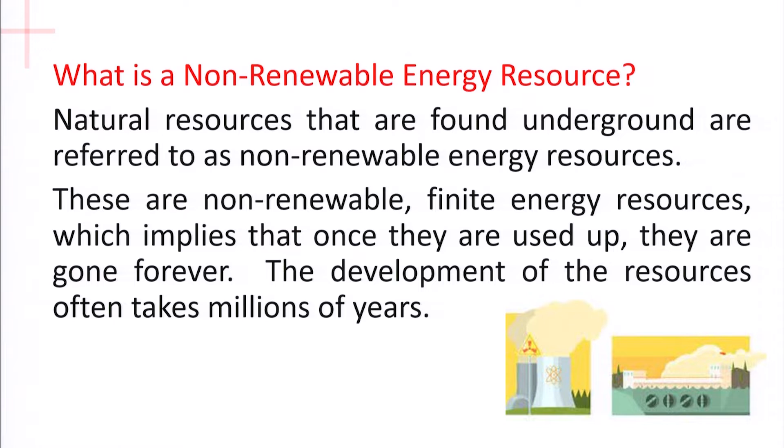What is a non-renewable energy resource? Natural resources found underground are referred to as non-renewable energy resources. These are finite energy sources, which implies that once they are used, they are gone forever. The development of these resources often takes millions of years. The two major non-renewable resources are fossil fuels, which include coal, oil, and natural gas, and the other is nuclear power, which is obtained from uranium ore.

Non-renewable energy sources are extracted in the form of solids, liquids, and gas, which are subsequently transformed for consumption. The solid form is coal, whose composition includes carbon, hydrogen, nitrogen, sulfur, oxygen, and minerals. The oil form is petroleum, with composition including carbon, hydrogen, nitrogen, sulfur, oxygen, and minerals. The gas form is natural gas, which has all the others except minerals.

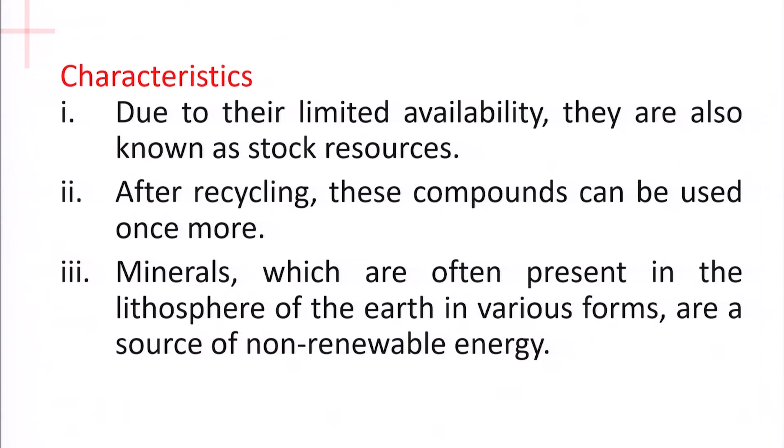What are the characteristics of these fossil fuels? Due to their limited availability, they are also known as stock resources. After recycling, these compounds can be used again. Minerals, often present in both coal and petroleum in the lithosphere of the earth in various forms, are the source for non-renewable energy. Non-renewable energy sources can be found in gas, solid, and liquid form, in all three states of matter. Non-renewable energy resources include coal, ignitable materials, petroleum, and natural gas.

Now let us see the fossil fuel coal. The use of coal as an energy source has a long history. The Chinese mined and exploited coal as a fuel since 10,000 BC, and also used it for smelting of ores. This resource was also used in several parts of the world during the Bronze Age, between 2000 and 1000 BC.

In more recent times, coal still provided 25% of the world's primary energy supply, ranking behind oil at 35%, and ahead of natural gas at 21%. Because the reserves of coal are large compared to those of oil and natural gas, coal was an important energy source for the common man.

About 300 million years ago, plant debris that flourished in freshwater wetlands gave rise to coal. Now let us see how this plant and animal matter gets transformed into coal.

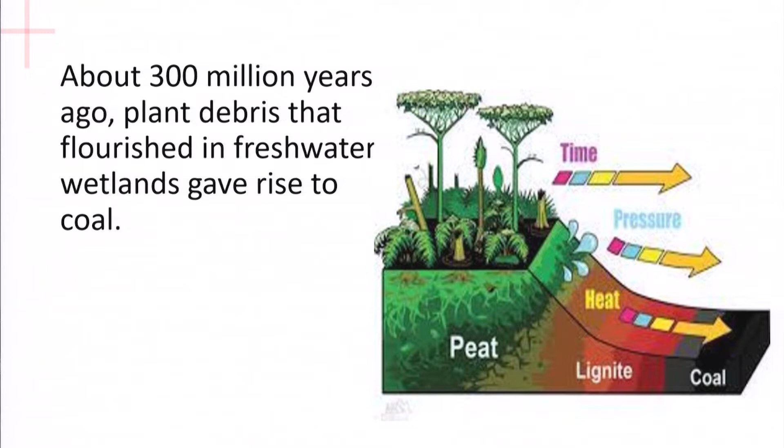Peat, also known as peat bog, was created as a result of the accumulation of dead plant matter. Since the plant matter piled below the water, the lack of oxygen in the wetlands prevented decomposition. Many peat sites are submerged inside the oceans, and the peat was then covered with sea sediments. The nature of the peat bog progressively altered due to the weight of these sediments above it, and slowly, over millions of years, coal was created.

Even though peat is a low-grade fuel because of its high water content, it is nonetheless very useful as a fuel today. After being pushed down by silt over many centuries, peat eventually turns into coal.

It first transforms into lignite, which is a low-grade coal, also known as brown coal. Rock that is dark or brownish is coal, and coal is burnt to produce energy. The transformation of ancient life into coal is known as carbonization.

3 meters of dense vegetation is required, and when this 3 meters of dense vegetation is crushed, we get just 1 foot of coal. So we need 3 meters of vegetation over millions of years, which gets transformed into just 1 foot of coal. That is the extent of the number of years required to form coal.

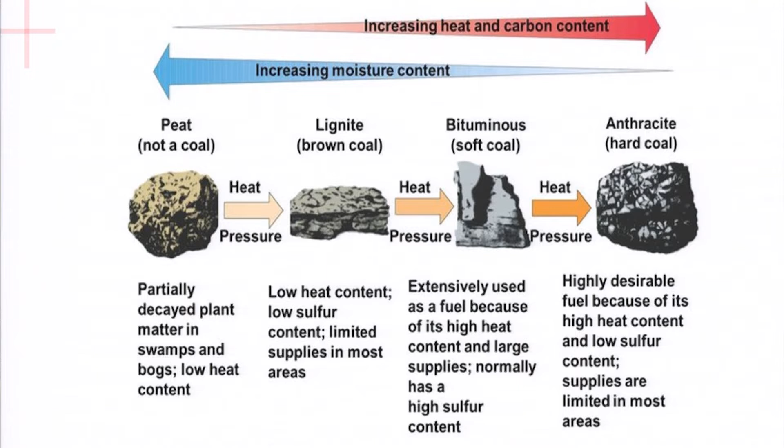After many years of heat and pressure underneath the earth, we get anthracite, which is the hard coal. Hard coal is a highly desirable fuel because of its high heat content and low sulfur content, but supplies are very limited and available only in rare areas.

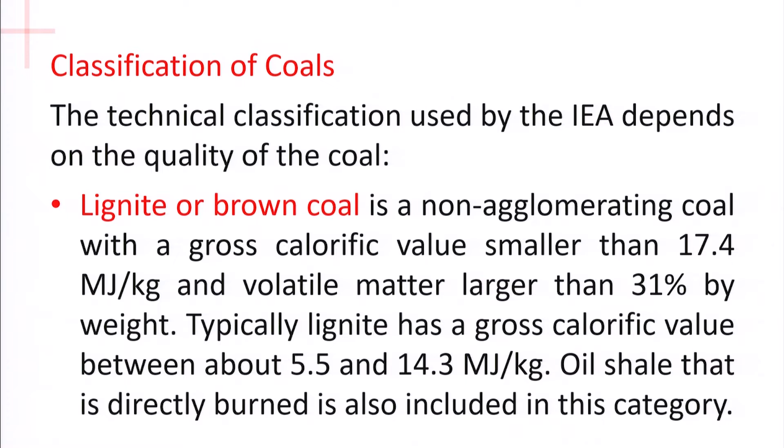Now let us see the classification of coal in detail. Lignite or brown coal is a non-agglomerating coal with a gross calorific value smaller than 17.4 megajoules per kg, which is the heat content available, and it has volatile matter larger than 31% of its weight. Typically, lignite has a gross calorific value between 5.5 to 14.3 megajoules per kg.

Subbituminous coal is a non-agglomerating coal with a gross calorific value larger than 14.3 megajoules per kg but smaller than 17.4 megajoules per kg, and the volatile matter is larger than 31% by weight.

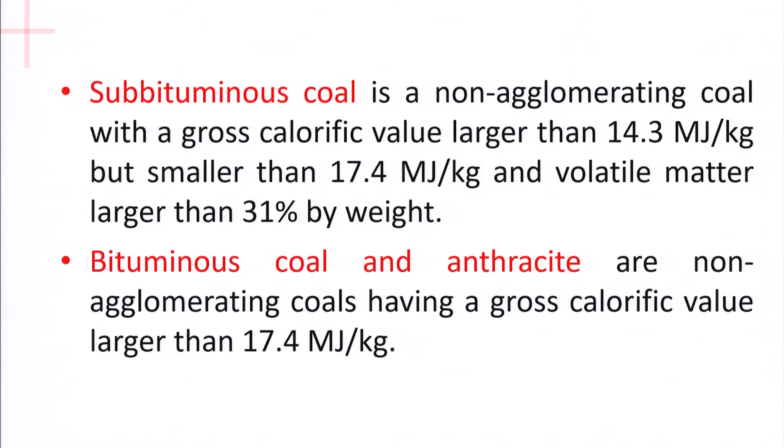Bituminous coal and anthracite are non-agglomerating coals with a gross calorific value larger than 17.4 megajoules per kg. So the heat content present in anthracite is very high.

Coal can be mined in two ways: either underground mining or surface mining. When coal is found beneath the earth's surface, often 300 meters or 1000 feet below the surface, deeper than the majority of the Great Lakes, underground mining is employed.

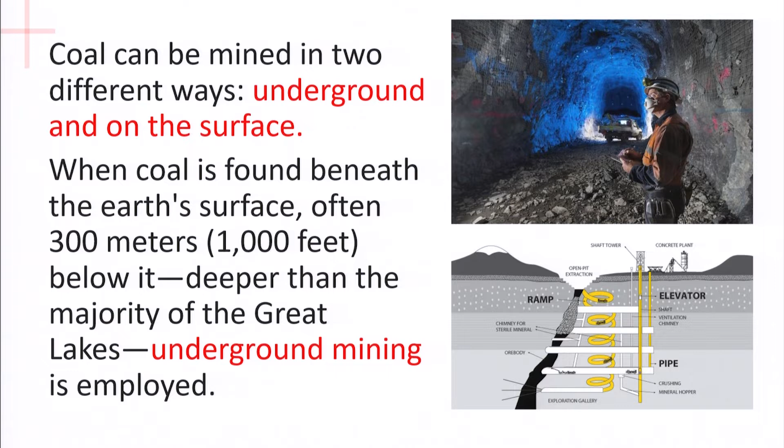As the animation indicates, underground mines are like tunnels where even vehicles pass through. The coal mined from these underground mines is transported using lorries that go inside the mines, and then it is brought out to the surface through elevators.

When coal is found relatively close to the earth's surface, it is called surface mining. Companies must first remove the region to get the coal - the soil and trees are removed, making it simpler to get the coal from the earth. This process results in the destruction of the natural habitat in and around that area.

These are the different layers found when coal mining is done. In underground mining, we have elevators that go deep down into the earth's surface, as mentioned, 1000 feet below, and tunnels are formed to mine the coal. The natural habitat in the region is not spoiled to that extent compared to surface mining, where the habitat is lost because the area is cleared for surface mining.

The different types of surface mining could be mountaintop mine, contour mine, high wall or auger mine, or area mine. These are the different types of surface mining methods.

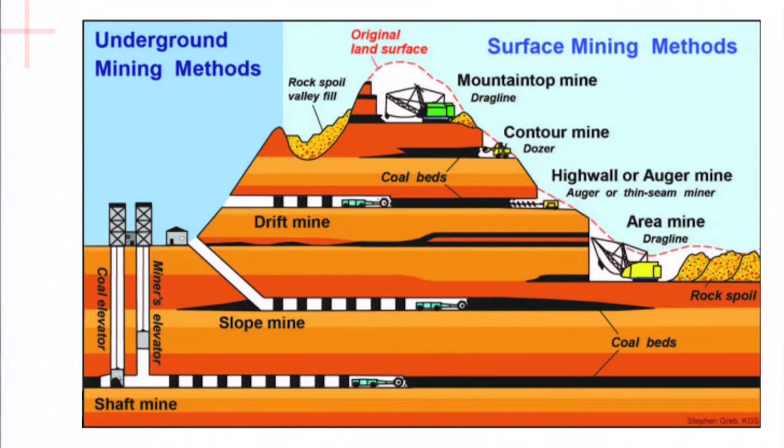Coal supplies around half of the country's electricity. Our lights, refrigerators, dishwashers, and the majority of plugged-in devices are all powered by electricity that comes from coal. Burning coal also produces worthwhile byproducts - the leftovers are used to create a variety of products, including cement, polymers, and roadways.

Looking at the uses of coal, 68% is used for electricity generation, and 18% is for general other purposes like refineries, paper manufacturing, chemicals, and pharmaceuticals. 7% is used for steel production, 4% for cement production, and 3% of coal is used for heating purposes.

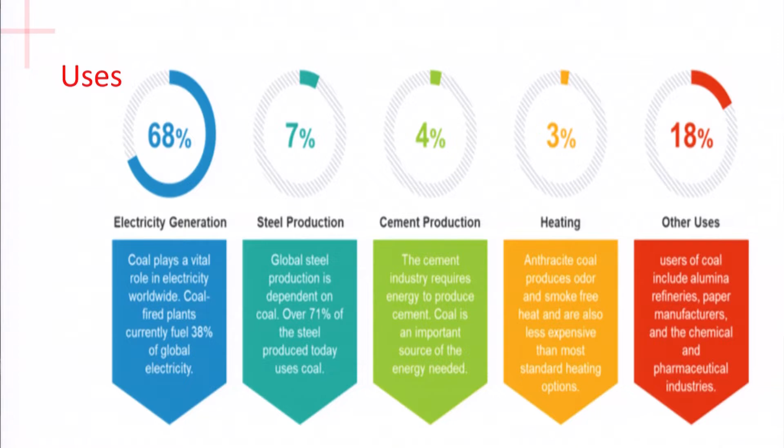However, coal is a very dependable form of energy. We can count on it to supply fuel and electricity day and night, in the summer or in the winter, whether there is sunlight or whether there is rain. So coal is a very dependable fuel.

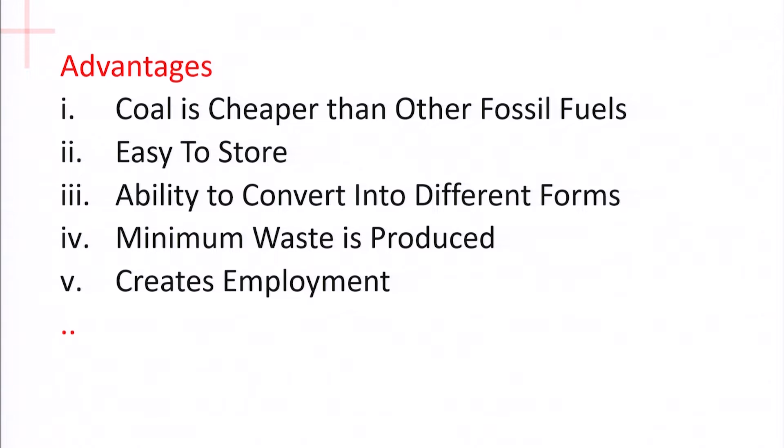However, it does have its own advantages and disadvantages. Advantages are: coal is cheaper than other fossil fuels, it is easy to store, it has the ability to convert into different forms of energy, there is minimum waste produced, it creates a lot of employment for people, it is highly compatible with minimal room for wastage, and it is a safe alternative.

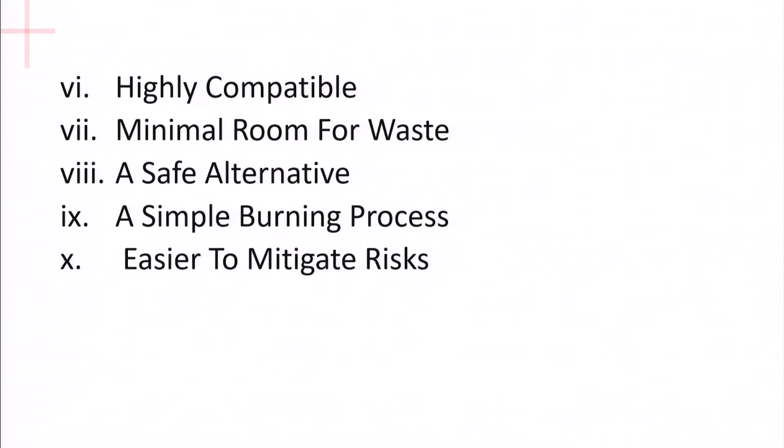It has a simple burning process and it is easy to mitigate risks. Now, there are so many advantages. Now, let us see the disadvantages and why we say fossil fuels is not an environmentally friendly fuel.

Disadvantages: it is non-renewable. The coal that has been formed over millions of years, we are taking it to produce electricity. So once we use the coal, we are not going to get back the coal. So it is non-renewable. It is harmful to health.

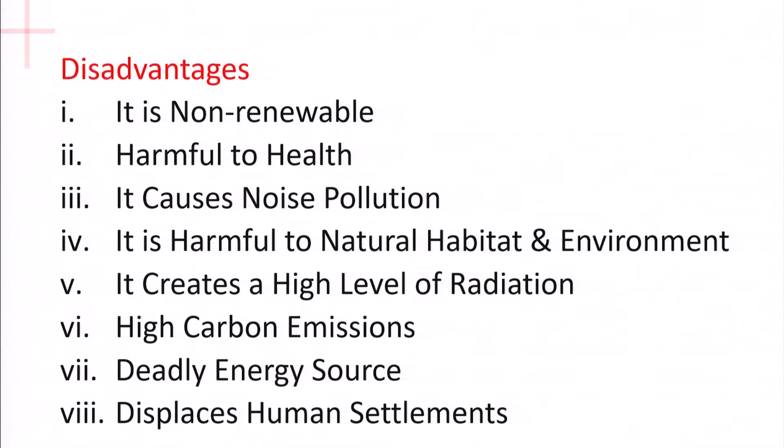It causes noise pollution. It is harmful to the natural habitat and to the environment. It creates a high level of radiation. There are high carbon emissions and it is a deadly energy source. It displaces human settlements. But still, with all these disadvantages, we continue to use coal to produce electricity and we

Mining operations, which involves digging, blasting and removing rocks and soil that are on top of the coal seam, seriously impact the air quality and the noise level. In areas where there are aquifers, situated close to the river or the water beds, surface mining causes erosion, causes pollution, and the water gets contaminated.

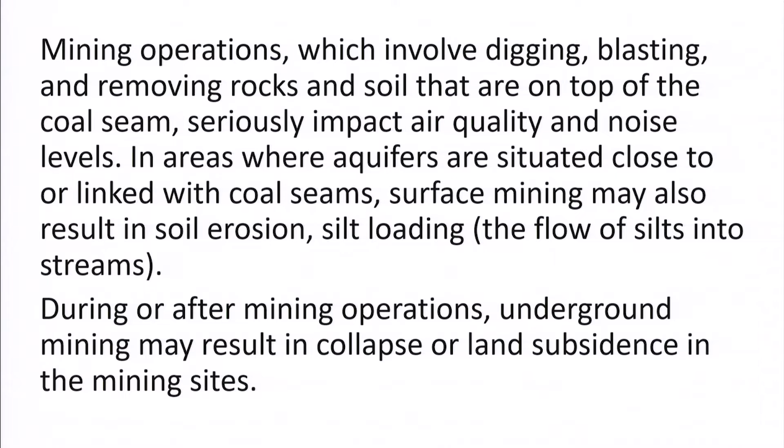During or after mining operations, the underground mining may collapse and land subsidence may take place in the mining sites. At work, coal miners risk cave-ins that could occur or sometimes explosions, because the miners are working inside the coal mines, which is the tunnels, and sometimes a cave-in may happen. So again, that's a serious threat to human life.

In addition, there is poisonous dust that is emanating when coal is being mined. So in addition to all these issues, the main cause of air pollution is the burning of coal in the thermal power plant where electricity is produced. That's the place where there is an enormous amount of air pollution that happens, which is harmful to the environment. It leads to climate change and several health hazards.

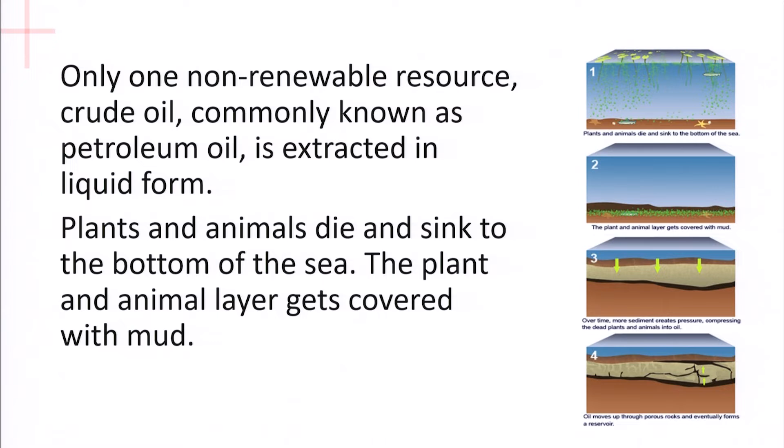Now coming to the second fossil fuel, which is petroleum, or in other words, oil. This non-renewable energy source, crude oil or petroleum oil, is available in liquid form. Plants and animals die and sink to the bottom of the sea. The plant and animal layer gets covered with mud. These remains were submerged under the mud and rock for over millions of years, similar to coal. Over time, more sediment creates pressure, compressing the dead plants and animals into oil.

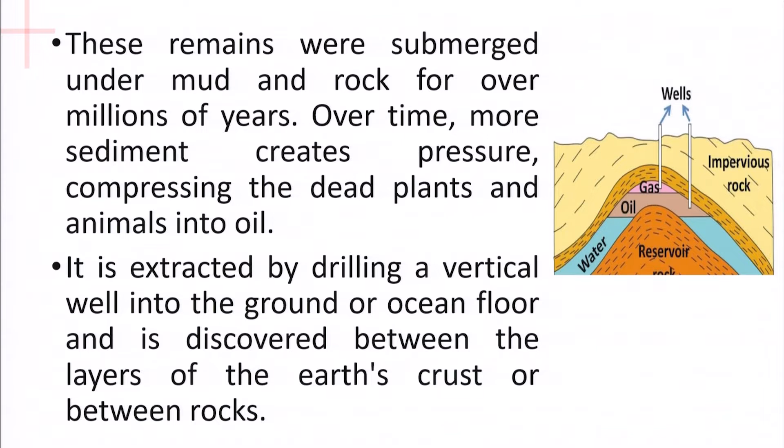It is extracted by drilling a vertical well into the ground or the ocean floor, and it is discovered between the layers of earth's crust or between the rocks.

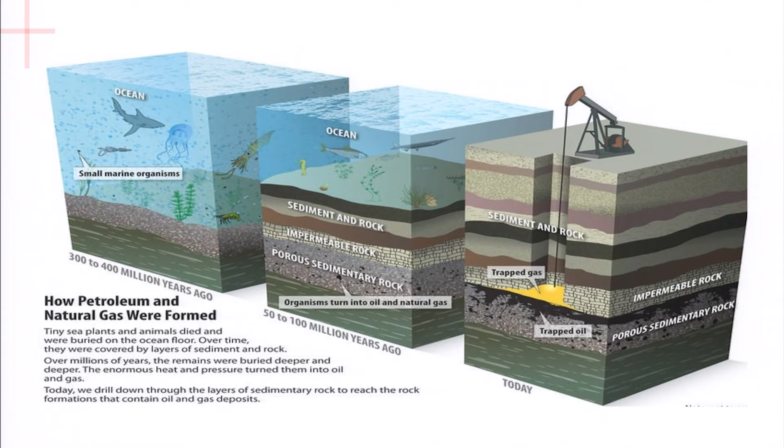Oil literally bubbles out of the ground in some locations. For example, in Los Angeles, California, at the La Brea tar pit, large pools of heavy oil are bubbling up through the soil. To reach the oil, we need to drill into the ground. Deposits can be found both on and beneath the ocean surface. Oil corporations can extract petroleum 365 days a year, 24 hours a day, using a drill rig. Companies dig offshore when oil is found beneath the ocean floor.

They need to construct an oil platform. Some of the largest man-made buildings are the oil platforms found in the oceans, known as offshore drilling rigs. Oil needs to be refined after it has been drilled. Petroleum, often known as crude oil, is a thick, dark liquid made up of flammable hydrocarbons with traces of oxygen, nitrogen, and sulfur.

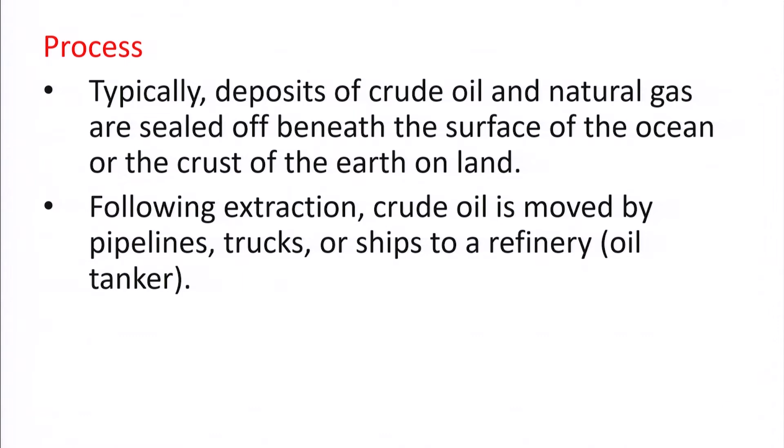Different types of products that we get from oil is possible through fractional distillation of the crude oil. Oil is heated and distilled in refineries to separate it into various components with various boiling points. As shown in the picture, we get gasoline around 25 to 60 degrees, petroleum gas at 25 degrees, naphtha between 60 to 180 degrees, paraffin between 180 to 220 degrees, diesel between 220 to 250 degrees, and fuel oil, which can be used in ships, between 250 to 300 degrees.

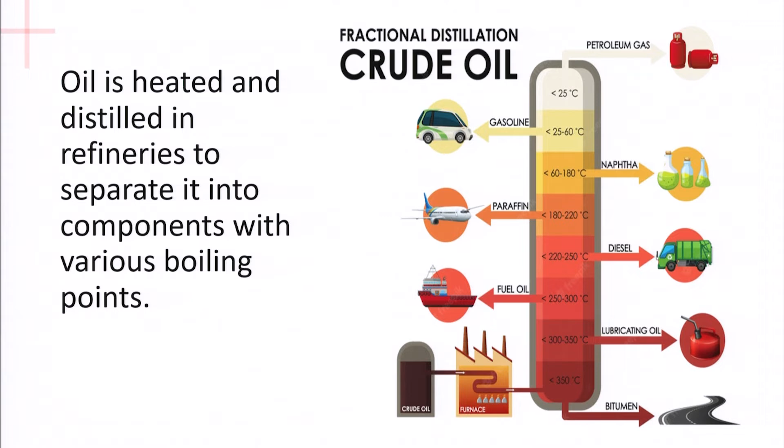Lubricating oil is a little denser. As we come down in the picture, we get liquid a little denser. So lubricating oil, which is a dense liquid, we get it at around 300 to 350 degrees. The crude oil helps us to get all these different types of products, byproducts, through fractional distillation.

The lowest level is the bitumen. Also tar is obtained, which is the waste out of the fractional distillation. Tar is also used for laying the roads. Gases and gasoline, aviation fuel, kerosene, diesel, oil, naphtha, grease, wax, asphalt are the key ingredients which we obtain from fractional distillation.

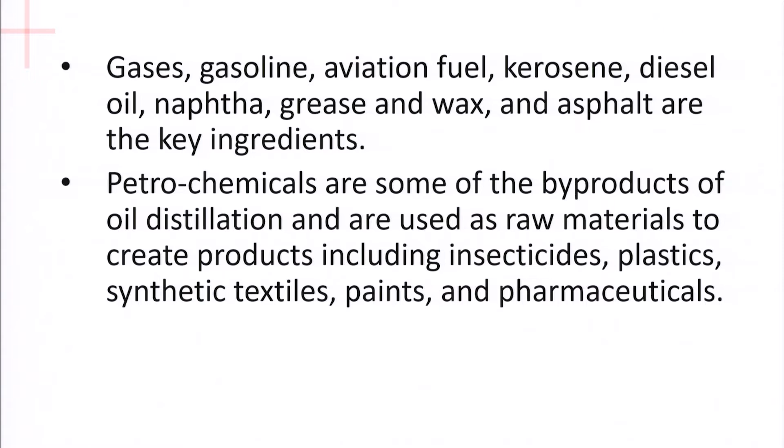Petrochemicals are some of the byproducts of oil distillation and are used as raw materials to create products including insecticides, plastics, synthetic textiles, paints, and pharmaceuticals. It is also used to produce plastics, heating oil, propane, jet fuel, artificial food flavors in addition to gasoline and diesel, and these are also used to power automobiles.

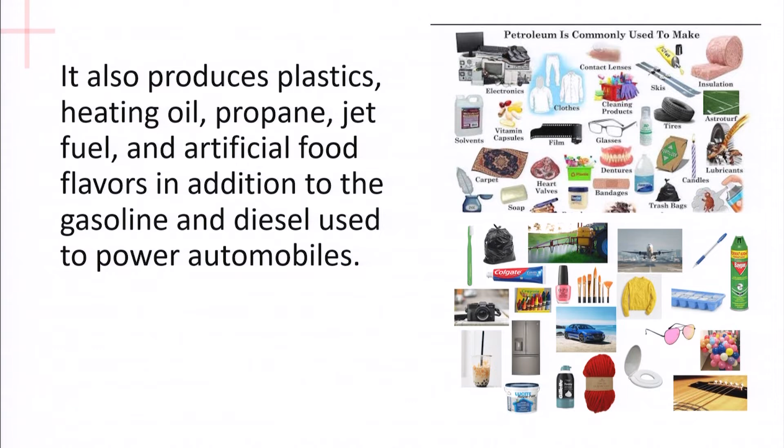Some of the petroleum products which are used is given in the animation. The remainder can be processed and used in solid products like water pipes, shoes, roofing, vitamin capsules, and thousands of other things. And the oil byproducts are also used for nail polish, etc.

So oil has got its own advantages and disadvantages. The cost of extracting is not very expensive considering the huge amount of oil that we get and the usage of the oil products. It is also a trustworthy and a consistent source of income and energy. It is a readily available energy source that enables us to travel by car in the form of petrol or diesel or natural gas. Numerous goods on which we rely contain petroleum as an ingredient.

Of course, it has its own disadvantages. The ecology is harmed when gasoline is used. We breathe in the dangerous fumes and gases that are released. More so, the fumes that come out of our vehicles has got very hazardous health impacts.

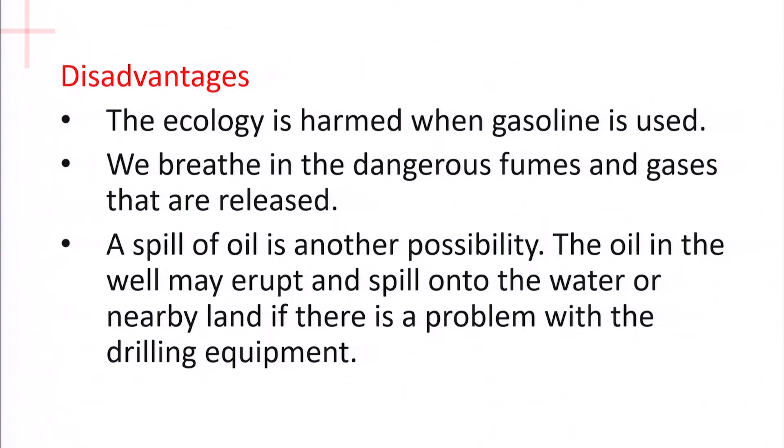A spill of oil is another possibility. The oil in the well may erupt and spill onto the water or nearby land if there is a problem with the drilling equipment. Environmental catastrophes are caused by oil spills, particularly offshore accidents. Oil floats on water, making it very difficult for the aquatic life, the fish, to survive, and it damages the aquatic life by the oil that is spreading over the ocean floor.

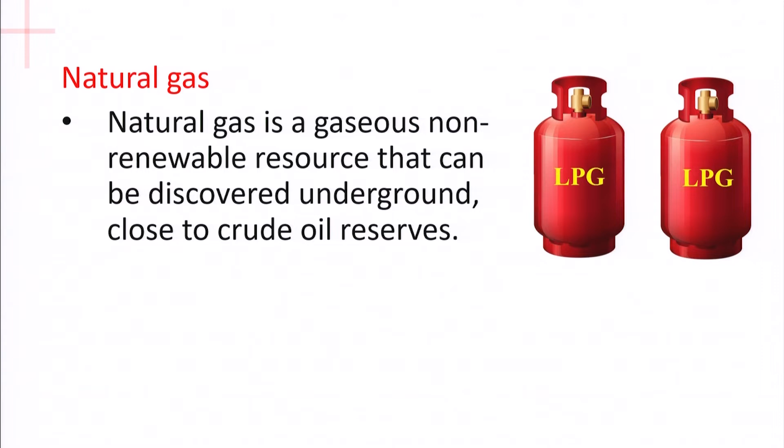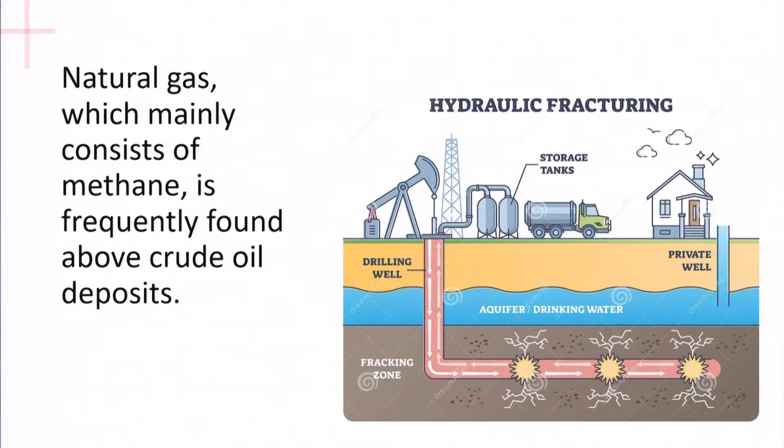Now coming to the third type of fossil fuel, which is natural gas. Natural gas is a gaseous, non-renewable resource that can be discovered underground close to the crude oil reserves. Natural gas, which mainly consists of methane, is frequently found above the crude oil deposits. Methane makes up the majority of the natural gas. Also, it can include other types of natural gas such as propane, ethane and butane. Additionally, it has trace levels of highly poisonous hydrogen sulfide as well as heavier gaseous hydrocarbons.

Natural gas is present underground in quantities that are measured in cubic meters. Deposits of natural gas can be found a few hundred meters under the ground. Companies can drill straight into the ground to extract the natural gas. In rock formations, they can extend maybe up to some kilometers wherein the natural gas is trapped.

Some businesses utilize a technique known as hydraulic fracturing, or fracking, to extract the natural gas. The term hydraulic or fracturing both refer to the use of water as a mechanism to draw out the gas. In this method, the subterranean rocks are torn apart using high pressure water. The stored natural gas will then be released from the rock formations. They can inject acid down the well to disintegrate the rock if it is very hard to break.

To prop open the rock and allow the gas to escape, sometimes they use a small, minuscule amount of sand particles or glass particles to break the rock.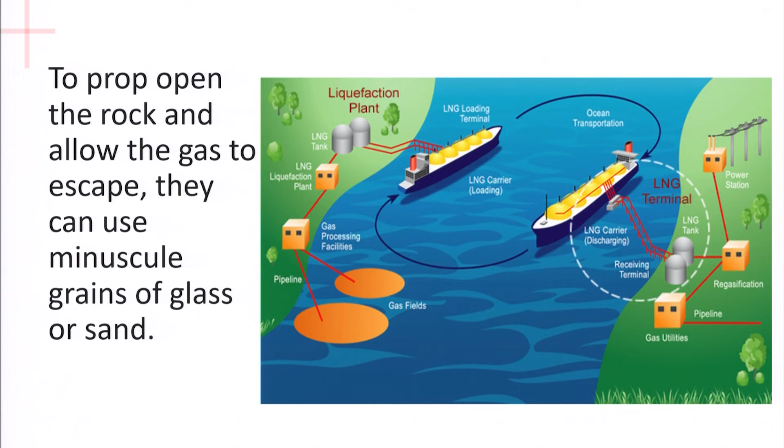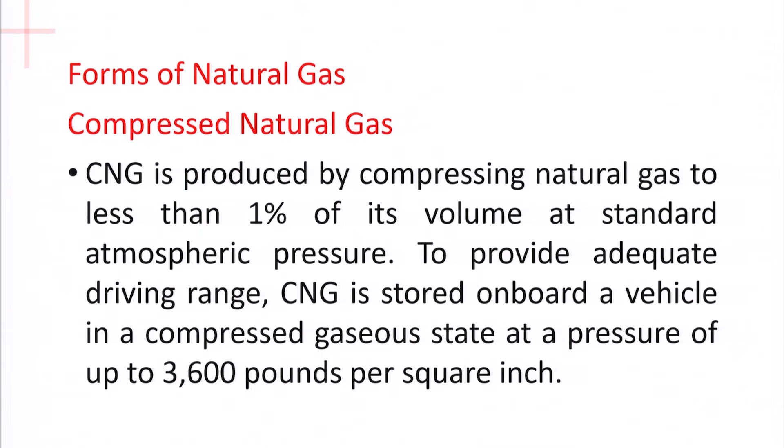Now, forms of natural gas. There are two forms: compressed natural gas, or CNG, and liquefied natural gas. Compressed natural gas is produced by compressing natural gas to less than 1% of its volume at standard atmospheric pressure. To provide adequate driving range, CNG is stored on board a vehicle in a compressed gaseous state at a pressure of up to 3,600 pounds per square inch.

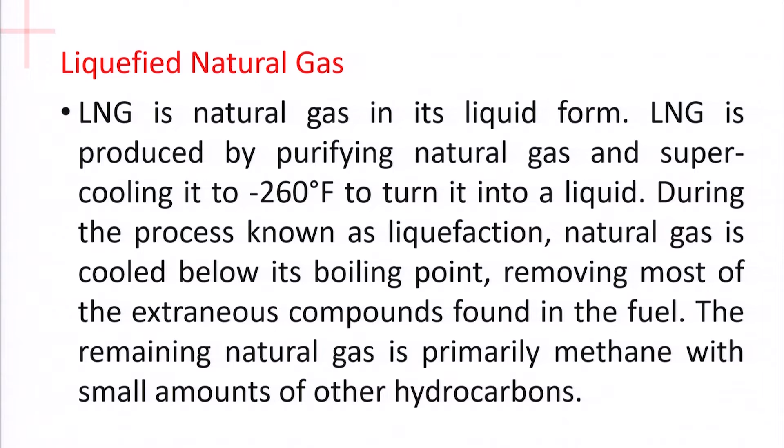Liquefied natural gas, or LNG, is natural gas in liquid form. LNG is produced by purifying the natural gas and supercooling it to minus 260 degrees Fahrenheit to turn it into liquid. During this process, known as liquefaction, natural gas is cooled below its boiling point, removing most of the extraneous compounds found in the fuel. The remaining natural gas is primarily methane with small amounts of hydrocarbons.

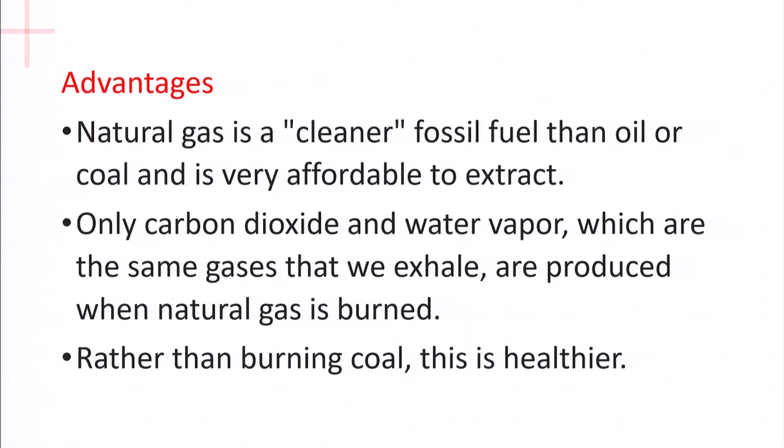There are advantages, as in all other types of fossil fuels, and there are disadvantages. Looking at the advantages, compared to other fossil fuels like oil and coal, natural gas is affordable to extract. Only carbon dioxide and water vapor are present, which, if we exhale it, is not very harmful. Rather than burning coal, this is healthier.

However, looking at the various problems associated with oil and natural gas, oil and gas leaks are a very important problem we need to address. Oil leaks are harmful if they get into the drinking water, and also harmful for aquatic life. Explosions may be caused by natural gas leaks from pipelines, storage tanks, and distribution tanks.

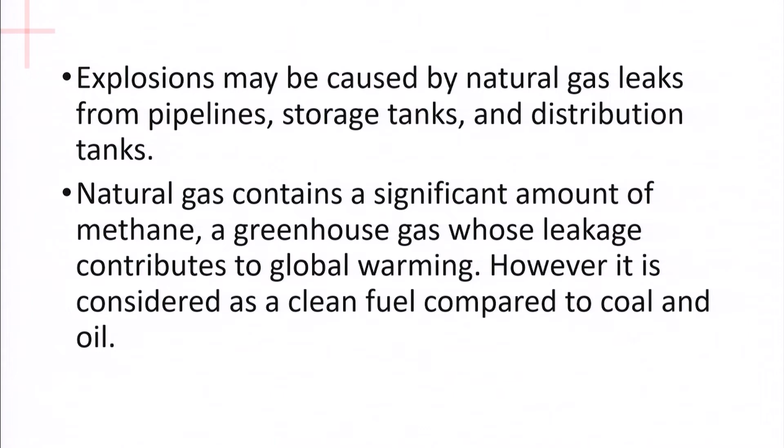Natural gas contains a significant amount of methane, a greenhouse gas whose leakage contributes to global warming. However, it is considered a clean fuel compared to coal and oil.

Subsidence, or land sinking, may also result from the extraction of oil and gas, similar to coal. Just like in coal mines, subsidence could happen in oil and gas mining as well. For instance, the extensive oil extraction that began in 1928 in the Long Beach Harbor neighborhood in Los Angeles, USA, resulted in considerable ground subsidence. The ground descended around 9 meters over the well location. There was a need for flood control measures along the shoreline due to the extensive subsidence. The cost of damage to roads, buildings, and other facilities is estimated at $100 million.

Brine was previously a significant issue with onshore oil wells. 10 barrels of brine are typically extracted for every barrel of oil produced. Early on, the brine was merely dumped into the ground or into adjacent waterways. Most brine today is injected back into the well. However, if the casing lining the well is broken or rusted, brine can contaminate fresh water and may get into the aquifers used for drinking water.

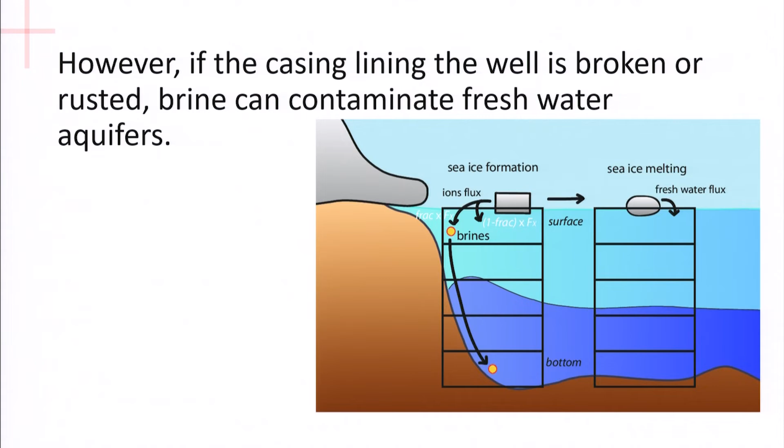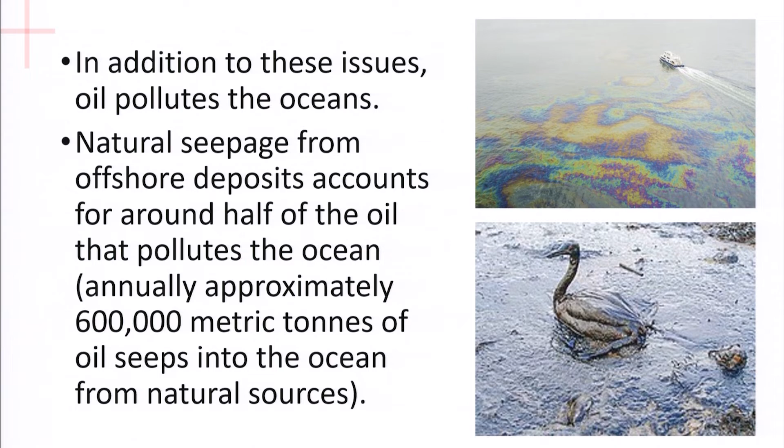In addition to these issues, oil pollutes the ocean. Natural seepage from offshore deposits accounts for around half of the oil that gets into the ocean floor. Annually, approximately 600,000 metric tons of oil is found to seep into the ocean, destroying aquatic life. Oil well blowouts, pipeline breaches, tankers, and pipeline leaks account for 20% of the oil that pollutes the ocean. The remaining oil is released inland and transported into the ocean by rivers.

In addition to routine operations, oil delivery to the coast also causes leakages from offshore wells. Both freshwater and marine habitats are impacted negatively by oil contamination. Aquatic plants and animals perish. It could take organisms 2 to 10 years to return to their original state.

Air pollution is also brought on by burning oil and gas. Environmental issues may arise during natural gas extraction. Mini earthquakes can also be produced because of the rock fracturing carried out to get the gas trapped in the rock.

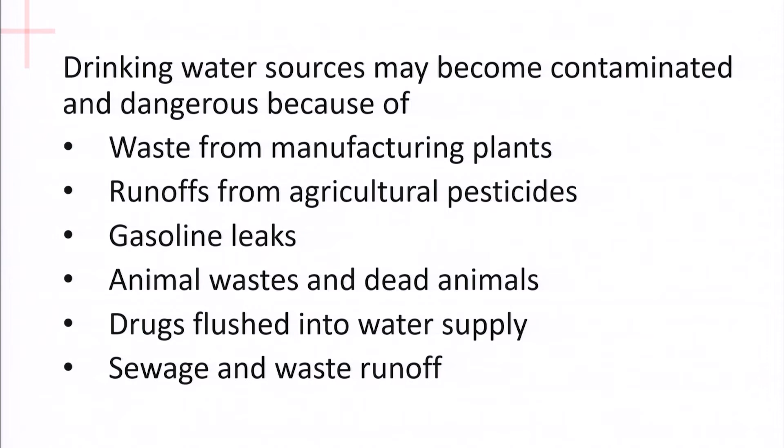Other water sources may also get contaminated by the high pressure water and chemicals injected underground during the extraction of gas. Drinking water sources may become contaminated and dangerous because of waste from manufacturing plants, runoff from agricultural pesticides, gasoline leaks, animal waste, dead animals, drugs flushed into the water supply, sewage, and waste runoff. So in addition to all this, the drinking water also gets contaminated from the extraction happening underground.

Nuclear fuels make up the second category of non-renewable resources after fossil fuels. Another non-renewable energy source frequently mentioned is nuclear energy. Although the material utilized in nuclear power plants is not a renewable energy source, nuclear energy itself is considered renewable.

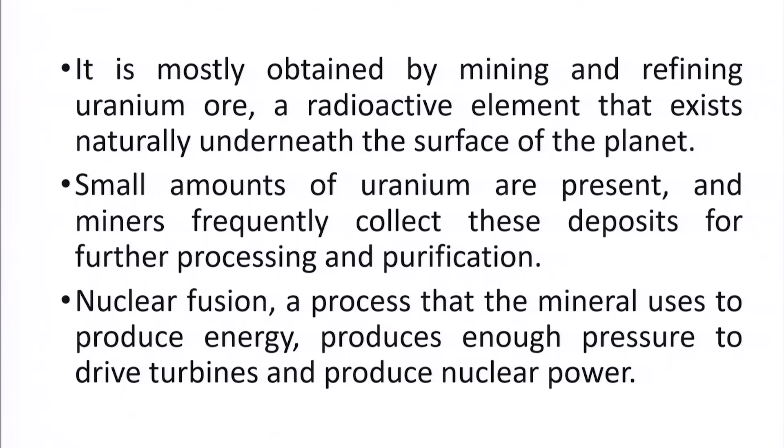It is mostly obtained by mining and refining uranium ore, a radioactive element that exists naturally underneath the surface of the planet. Small amounts of uranium are present, and miners frequently collect these deposits for further processing and purification. Nuclear fission, the process the mineral uses to produce energy, produces enough pressure to drive turbines and hence produce nuclear power. Atomic nucleus energy is referred to as nuclear energy.

High-tech techniques are utilized to produce nuclear energy from radioactive materials. Around the world, generating power via nuclear energy has now become very common. The potent energy contained in an atom's nucleus, or core, is harvested through nuclear energy. Nuclear fission is the splitting of an atom's nucleus, and this is the process that releases nuclear energy.

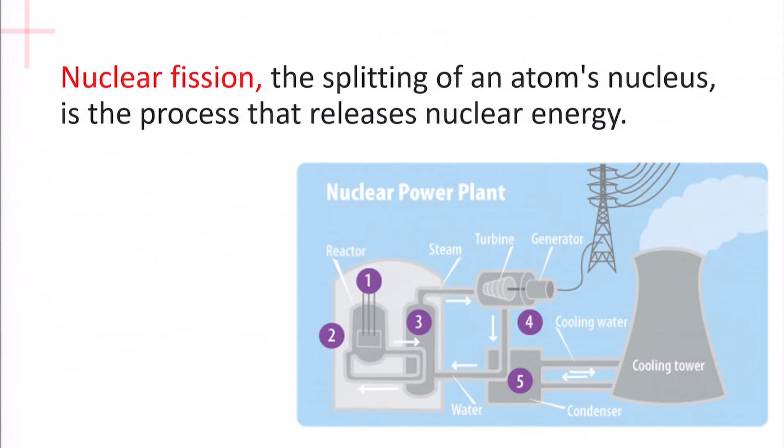As shown in the picture, it shows a nuclear power plant. Nuclear power plants are sophisticated devices that have the ability to control nuclear fission and generate electricity. The element uranium is one of the most frequently used sources of energy in nuclear power reactors.

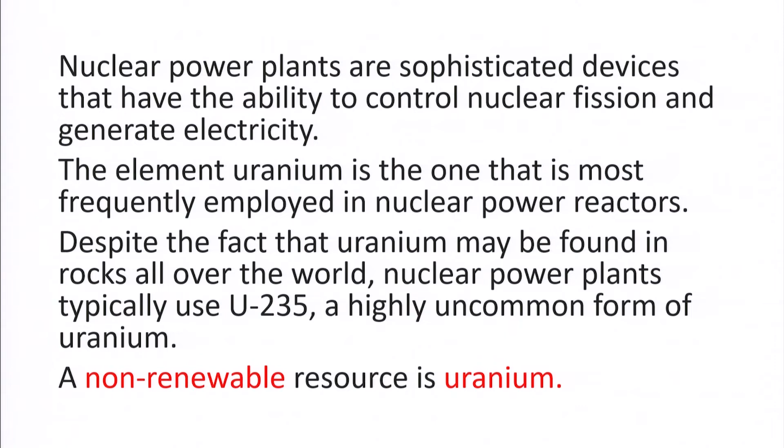Despite the fact that uranium may be found in rocks all over the world, nuclear power plants typically use uranium-235, which is a highly uncommon form of uranium. It is a non-renewable resource. It is possible to get energy from radioactive materials using both nuclear fission and nuclear fusion.

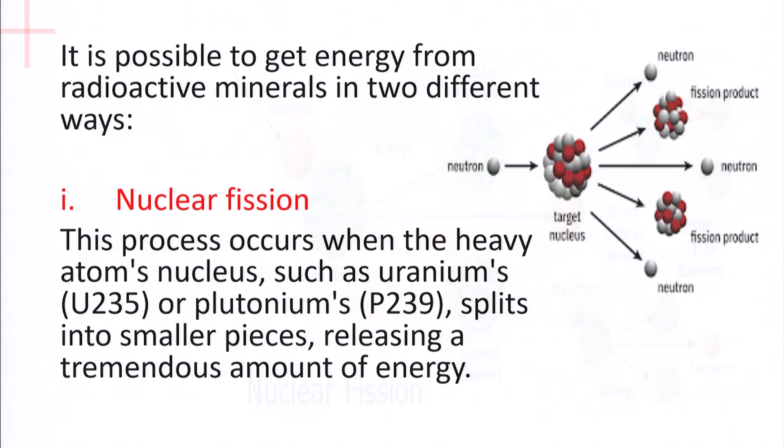In nuclear fission, this process occurs when a heavy atom nucleus, such as uranium U-235 or plutonium P-239, splits into smaller particles, releasing a tremendous amount of energy. As shown in the picture, the neutron gets absorbed by uranium-235, or plutonium, and it releases energy as it breaks into lighter elements.

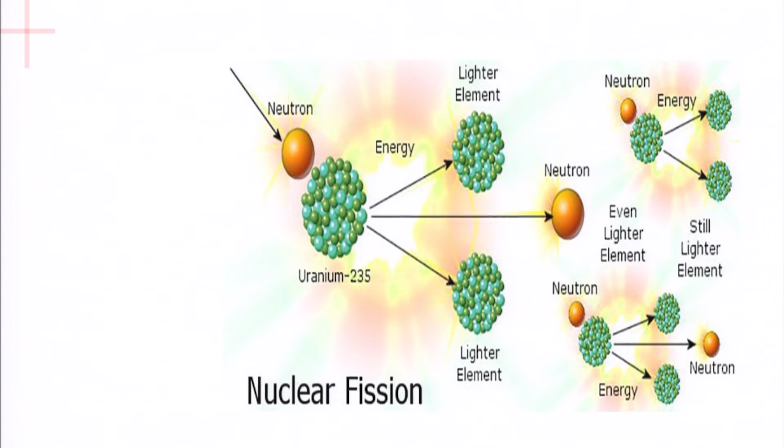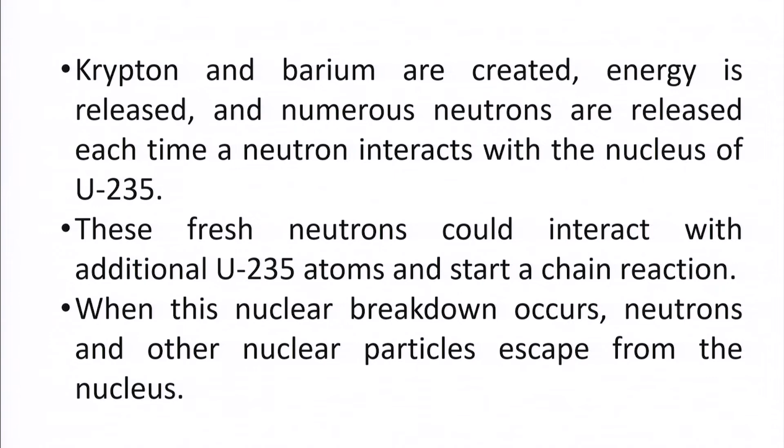This tremendous amount of energy drives the turbine. Krypton and barium are created, energy is released, and numerous neutrons are released each time a neutron interacts with the nucleus of uranium-235. These fresh neutrons could again interact with additional U-235 atoms and start a chain reaction.

When this nuclear breakdown occurs, neutrons and other nuclear particles escape from the nucleus. The neutron may lead to the splitting of other atomic nuclei, releasing additional neutrons as well as energy. Once started, this chain reaction will not stop. It keeps releasing energy until the fuel is used up or the neutrons are kept from colliding with other atomic structures.

The nuclear chain reaction is regulated in the reactor of a nuclear power plant. The heat produced is utilized to create high pressure steam which spins the turbines, which in turn provides electricity. Heat is dissipated by a water coolant and transferred to water in a steam generating unit via a heat exchanger. The steam generated drives the turbine, which generates electricity. After the steam has passed through the turbine, it is condensed using cooling water.

Next, coming to the second type, which is nuclear fusion. So how does nuclear fusion work? The hydrogen atoms are heated and a fusion reaction takes place. Fusion is joining together, just like fission is breaking away, fusion is joining. Here, deuterium and tritium join together, resulting in helium and releasing a neutron. Again, an enormous amount of energy is released, which is used to heat the water and generate steam.

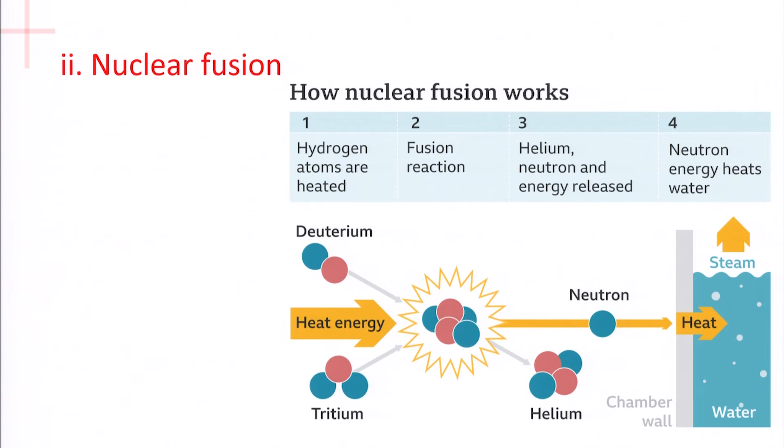In this process, lighter nuclei such as those of hydrogen isotopes, deuterium and tritium, combine to generate larger, heavier nuclei, releasing enormous amounts of energy. Two other nuclear technologies for producing energy from nuclear fuel in a safe and cost-effective manner have also been proposed: nuclear breeder reactors and fusion reactors.

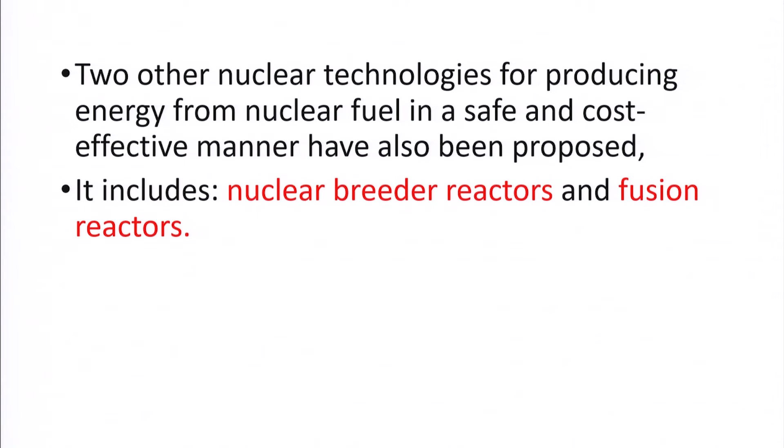Now it has got its own advantages. As all of us know, nuclear resource is a very good energy source. But if there are accidents, care has to be taken because thousands of people get affected. First, let us see the advantages.

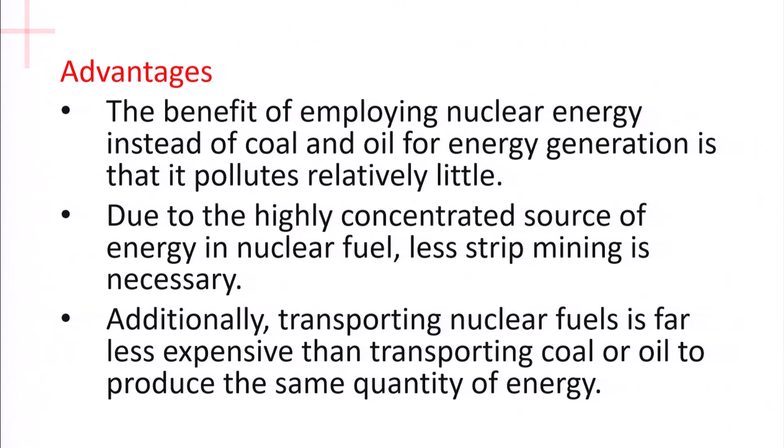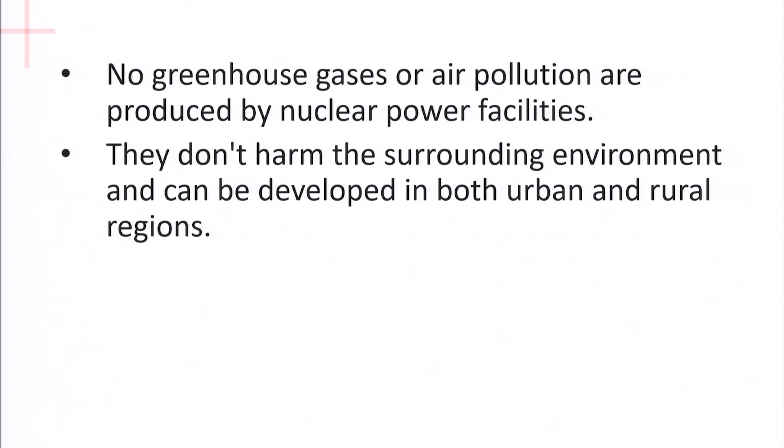The benefit of employing nuclear energy instead of coal and oil for energy production is that it pollutes relatively less compared to oil and coal. Due to the highly concentrated source of energy in nuclear fuel, less strip mining is necessary. Additionally, transporting nuclear fuels is far less expensive than transporting coal or oil to produce the same quantity of energy. No greenhouse gas or air pollution are produced by nuclear power facilities. They don't harm the surrounding environment, and can be developed in both urban and rural areas.

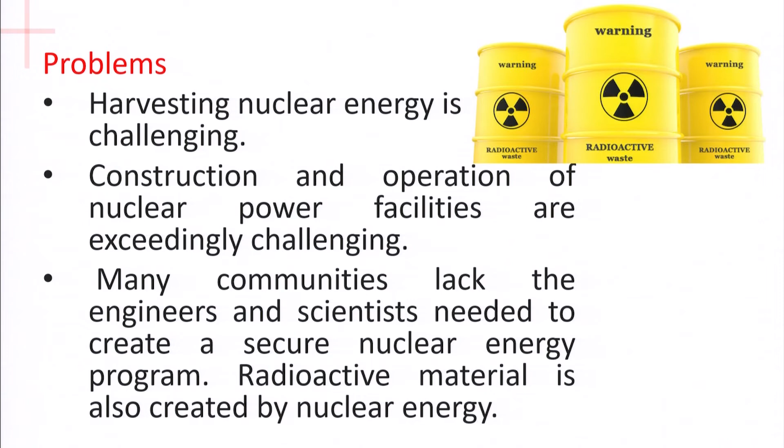However, it has got its disadvantages, where care has to be taken. Harvesting nuclear energy is challenging. Construction and operation of a nuclear power plant is exceedingly challenging. Many communities lack the engineers and scientists to create a secure nuclear energy power plant. Radioactive material is also created by nuclear energy, and radioactive wastes are very harmful to humans.

An alternative to fossil fuel for energy production is radioactive materials. Radioactive ore is only available in a finite amount of supply. On the other hand, a tiny amount of radioactive materials can produce a lot of energy.

However, extremely toxic radioactive waste can result in burns, increase in skin cancer, blood disorders, bone degeneration, among several other health hazards. It could cause skin diseases, also damage the reproductive organs in human beings. It can cause abnormality in bone marrow, destroys the retina of eyes.

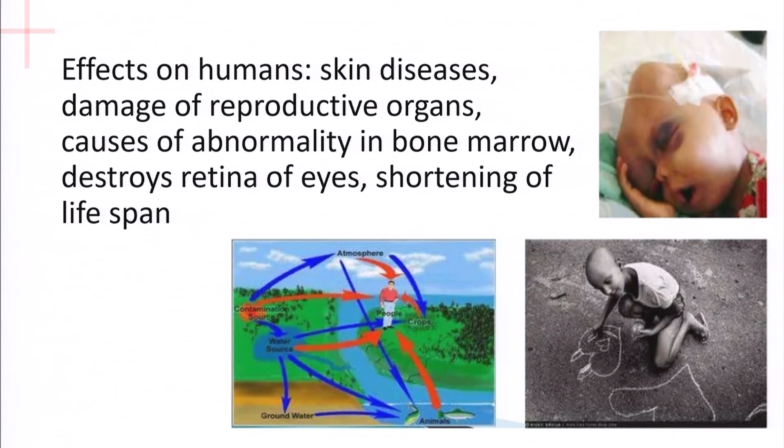So the toxic radioactive waste that comes out of nuclear energy has to be stored in a very careful location which is not used for several years. Radioactive pollution results from improper disposal of this radioactive waste.

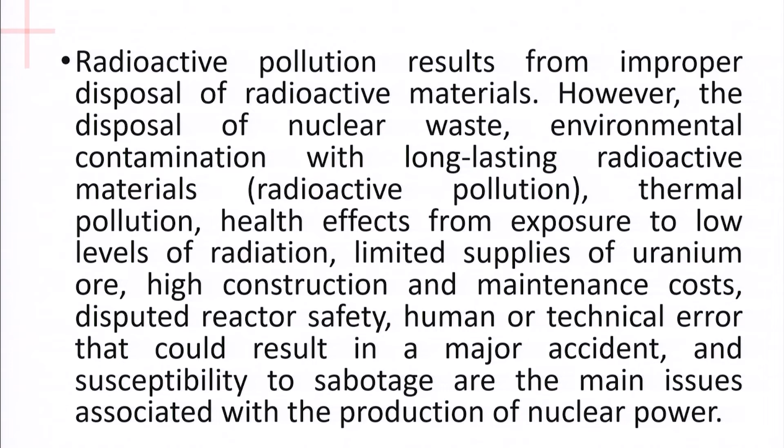However, the disposal of nuclear waste, environmental contamination with long-lasting radioactive materials, thermal pollution, health effects from exposure to low levels of radiation, limited supply of uranium ore, high construction and maintenance costs, disputed reactor safety, human or technical error that could result in major nuclear accidents are some of the major disadvantages in going in for nuclear energy use.

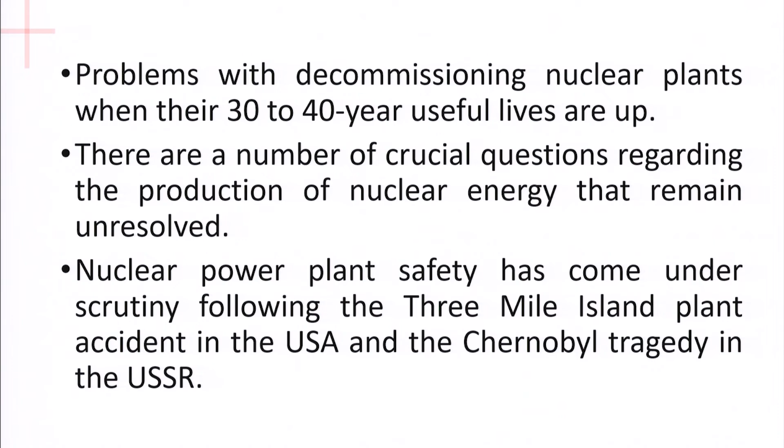Problems with decommissioning nuclear plants when they are 30 to 40 years old is a challenge. There are a number of crucial questions regarding the production of nuclear energy that has still not been solved. Nuclear power plant safety has come under scrutiny under the 3 Mile Island plant accident in USA as well as the Chernobyl tragedy that happened in USSR.

Now let us look at the advantages of non-renewable energy at the overall level. Energy content of the non-renewable energy materials is very high. Compared to renewable sources like solar and wind, resources like coal and oil generally give us more energy, and it is readily available at the outlets.

Coal mining, oil sales, and the building of pipelines for natural gas can all result in enormous riches. In a home or somewhere else, these resources are very simple to use since they are available in pipelines and readily available at the point of switch.

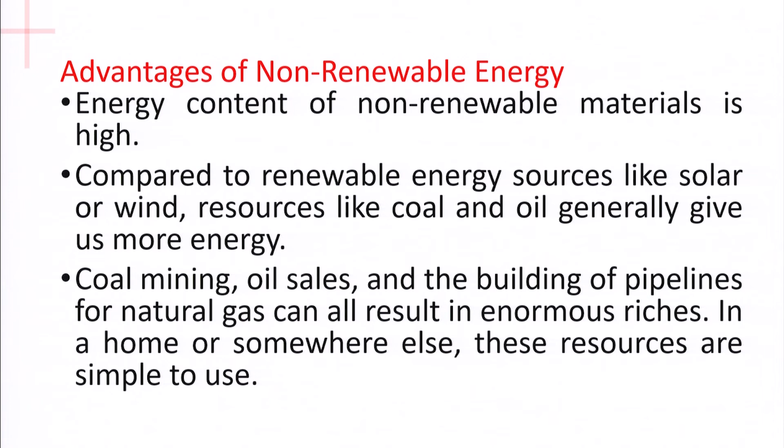Non-renewable energy sources are available to consumers at a very reasonable cost because of its massive usage. Some people believe conventional energy sources like coal and oil cannot be replaced by new technology, so they do not want to go for an alternate fuel.

It is simple to locate non-renewable energy everywhere. This suggests that they can be easily transported across the globe. Non-renewable energy is a resource that can be used by people who are also living in remote areas.

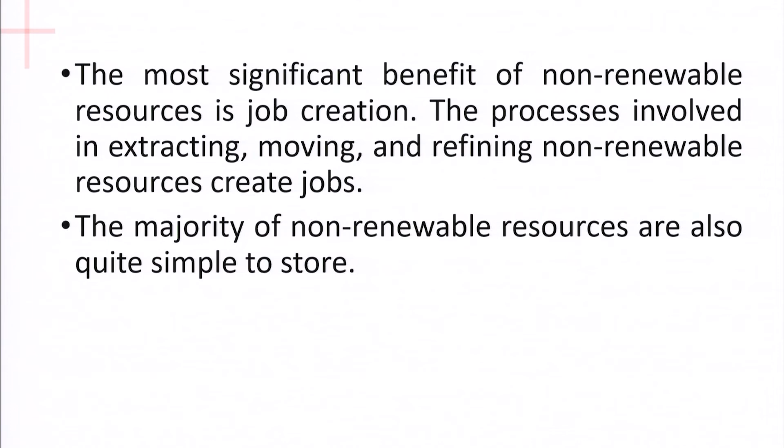The most significant benefit of non-renewable resources is massive job creation. If it is coal mining or oil mining, there is an enormous amount of job creation for that locality. The processes involved in extracting, moving, and refining require people. The majority of non-renewable resources are also easy to store.

Now coming to the disadvantages of these non-renewable energies. The time-consuming nature of non-renewable energy is one of the major drawbacks. If it is coal or oil, it has taken millions of years to get this energy, to get the form of coal or the form of energy or the gas.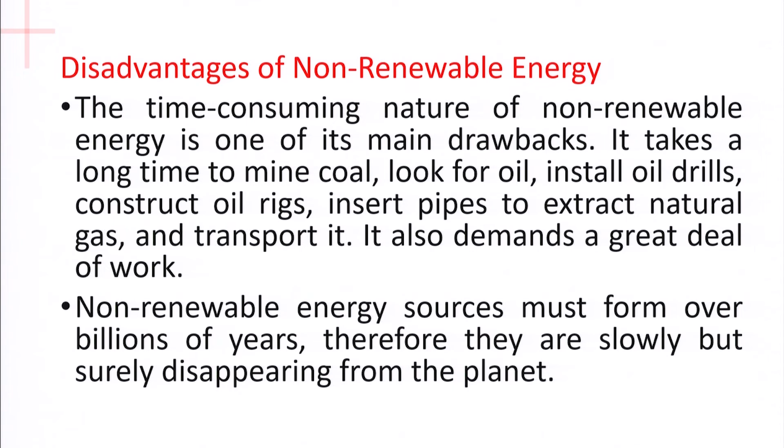Non-renewable energy source, as the name suggests, is not renewable in nature and requires billions of years to get formed. Usage causes the disappearance of this energy source. It could be selfish to use the non-renewable energy source carelessly without considering the needs of the future generation.

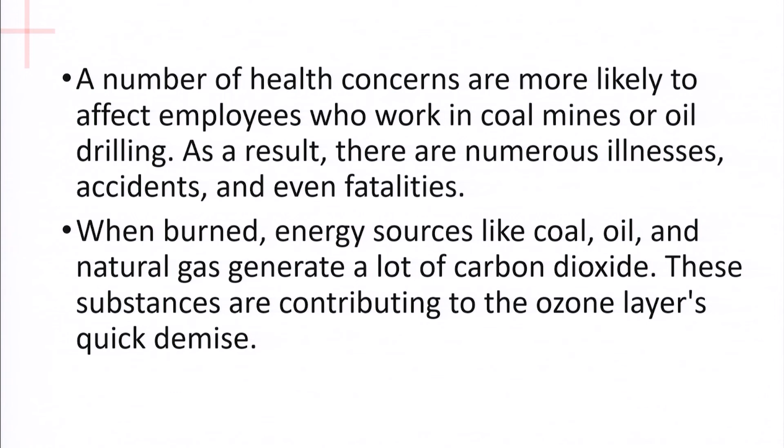Because non-renewable energy sources like fossil fuels release chemicals like carbon monoxide, they are very harmful and may cause respiratory diseases in people. A number of health concerns are more likely to affect people who work in coal mines and in oil drilling. When burned, energy sources like coal and oil generate a lot of carbon dioxide, which leads to climate change and global warming.

Oxides such as sulfur oxides and others created by the combustion of fossil fuels may lead to acid rain, which harms humans as well as wildlife.

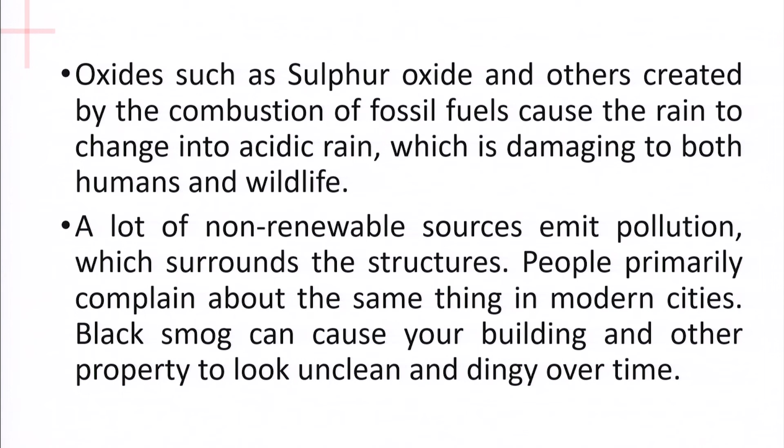A lot of non-renewable energy sources emit pollution which surrounds all the structures. People primarily complain in modern cities of smog, of dust, and not having a clean environment to breathe in.

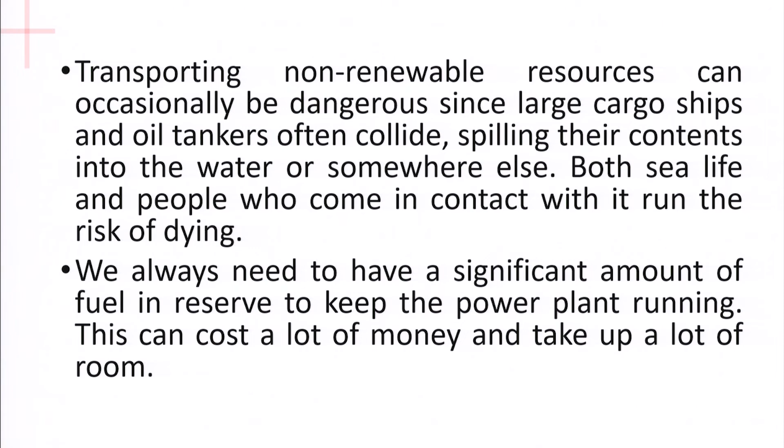Transporting non-renewable resources can occasionally be dangerous since large cargo ships and oil tankers may sometimes collide, which spills all the contents of the energy, be it oil, into the ocean, and this causes a lot of risk in terms of aquatic life dying.

We always need a significant amount of fuel in reserve to keep the power plant running. This could cost a lot of money and take up a lot of room.

Now let us see the global impact of using non-renewable energy. It is well known that burning fossil fuel harms the environment and is a contributing factor to global warming and climate change. Nuclear materials also carry concerns because of their toxicity and radioactive nature.

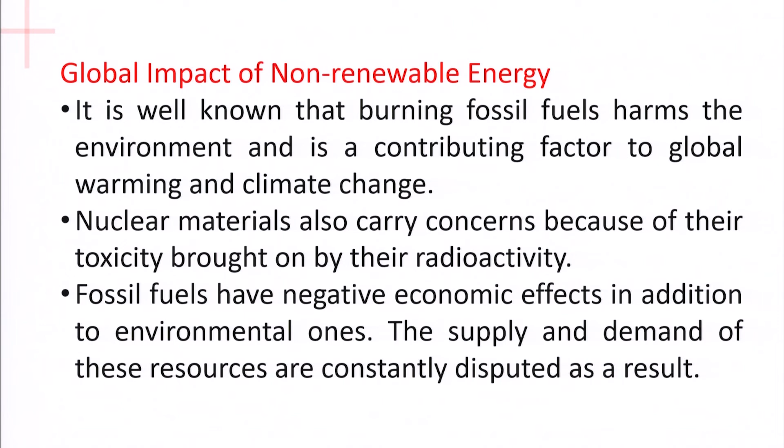Fossil fuels have negative economic effects in addition to environmental ones. The supply and demand of these resources are constantly disputed. The cost of obtaining these energies is steadily rising, and both suppliers and customers struggle to deliver and make use of these resources optimally. Consumers are eventually no longer able to purchase the product because of the escalating costs. Petrol prices always seem to be increasing, and as vehicles increase, petrol prices are also found to increase.

Now let us see the environmental impact of non-renewable energies. These resources which are found in nature are getting diminished and vanishing as we consume them. Oil reserves will run out by 2052, according to a recent study published in the scientific magazine Nature. The same is true for coal and natural gas. There will be a time when we won't have access to any fossil fuels.

It's not only because these resources are depleting that we need to look at other energy sources, but also because of the negative influence they have on the environment. When we look at climate change, carbon dioxide had a steady, almost constant increase up to 1950. But since 1950, after the Industrial Revolution, the emission of carbon dioxide has increased exponentially.

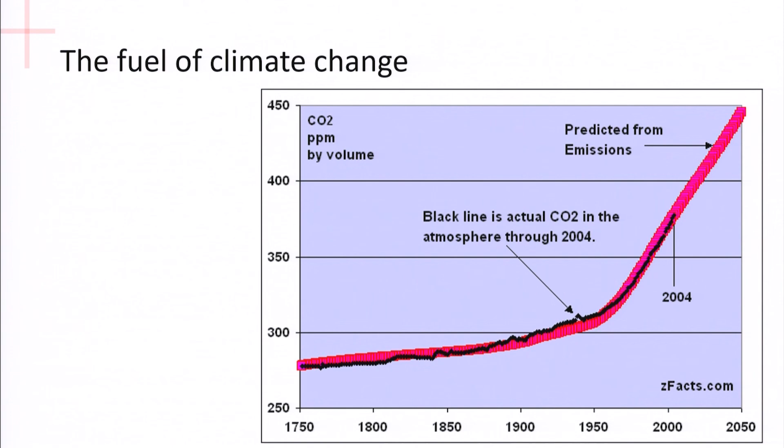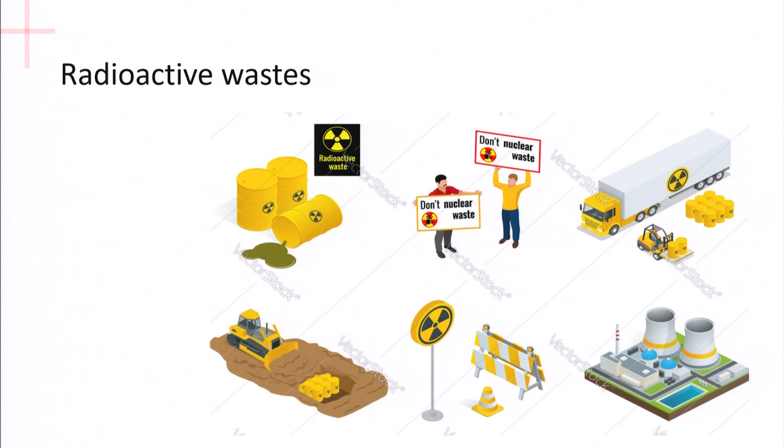Oil slicks and oil spills are a very dangerous hazard to the environment. If there is a leakage in radioactive waste, we cannot imagine the number of lives that will be lost. Acid rain is going to destroy plant habitat, animal habitat, and humans, affecting human health. So all these are the effects of using non-renewable energy.

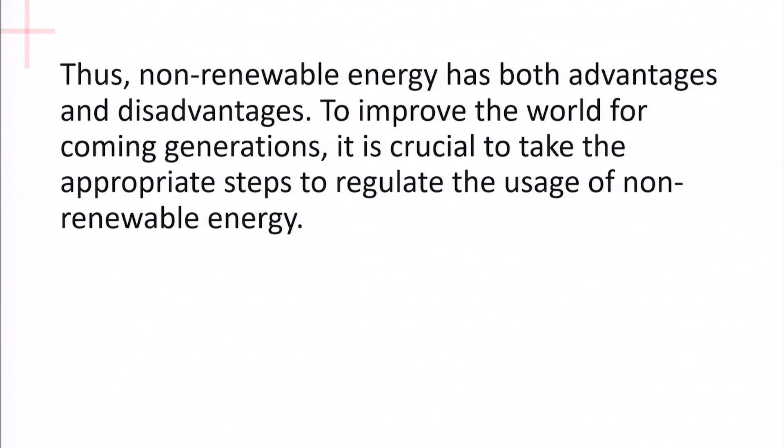Of course, usage of non-renewable energy has its own advantages, but to improve the world for the coming generation, to give a better, greener world for the future generation, it is crucial to take up appropriate steps to regulate the use of non-renewable energy sources.

Now let us see a few questions and answers in this module. Why is fossil fuel bad for our environment? Air pollution from fossil fuels can cause acid rain, eutrophication—excessive nutrients that can harm the aquatic ecosystem by lowering oxygen levels—damage to crops and forests, and harm to wildlife. All these are from the air pollution point of view.

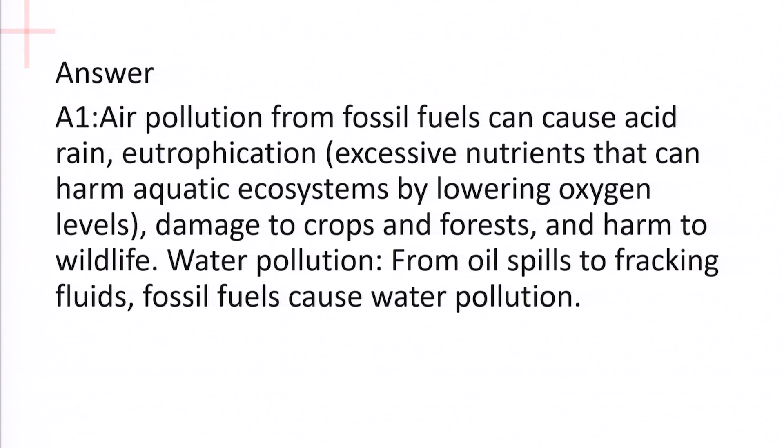In addition, there is water pollution because of oil spills and fracking of rocks to get gases from fossil fuel, which causes water pollution. So all these are the detrimental effects to the environment, the reason why we should not use non-renewable energy sources.

How long before we run out of fossil fuels? Because it is non-renewable in nature, there is going to be a time when we no longer have these fossil fuels. It is predicted that we will run out of fossil fuels during this century itself. Oil is expected to last only up to 50 years, natural gas only up to 53 years, and coal up to 114 years. Yet renewable energy is still not popular enough, and it is essential that we take up the usage of renewable energy to compensate for the non-renewable energy which is depleting and disappearing from the planet.

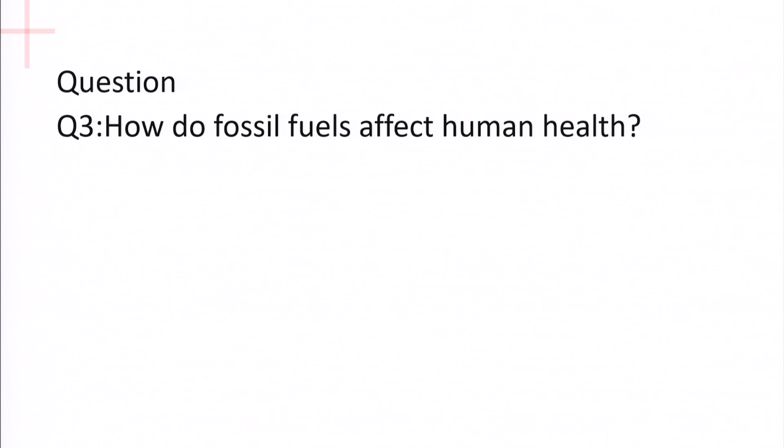Question 3: How do fossil fuels affect human health? Yes, all along we have seen how it has damaged the climate. The release of pollutants has caused deadly effects on the planet and on human health, such as strokes, disorders, asthma, and several other health disorders. It has also been linked to autism disorder, Alzheimer's disease, etc.

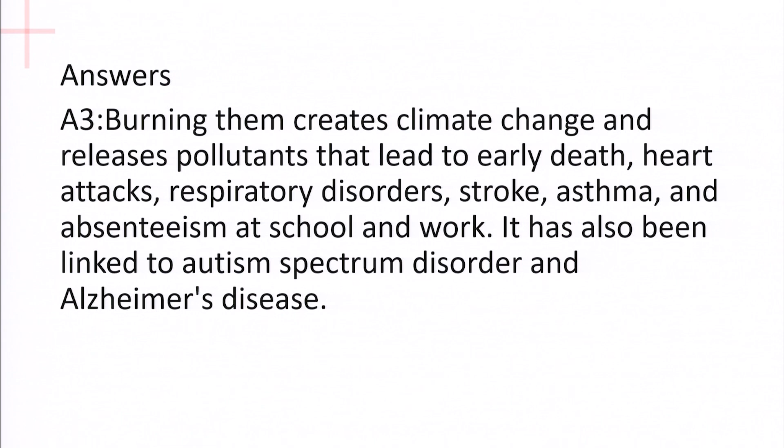So it is high time that we start thinking of switching over from non-renewable energy sources wherever possible to renewable sources of energy. In this module, we have learnt about the various types of non-renewable energy sources, understood the advantages and disadvantages of each, and discerned the necessity of using renewable energy sources in place of non-renewable energy sources for achieving sustainable development.